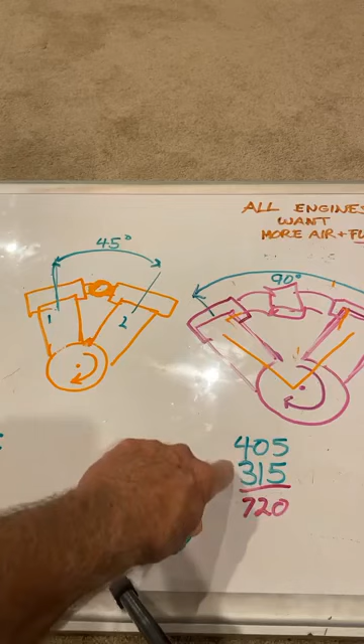So that's 405 for one stroke, 315 for the front and the rear. 405, 315, 405. Now look how far apart these are. That's why we have some really weird stuff going on in this.

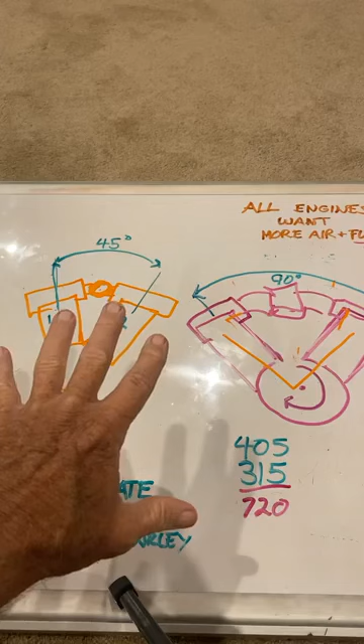And this is just for general knowledge so you guys can understand why some engines sound like an electric engine compared to this really weird piece that was designed back in the 1800s and finally went public in 1903. Harley started selling these to people in 1903 with this same combination.

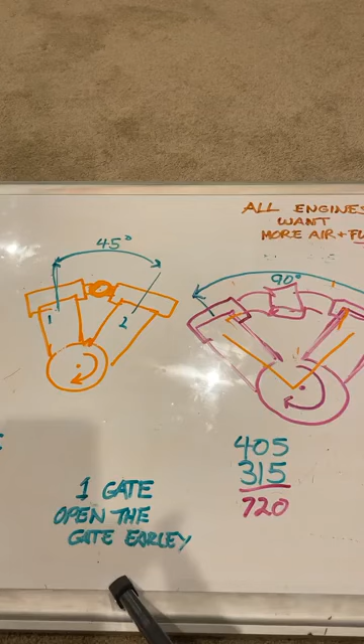And it's been loved and hated for 120 years. Okay, 119, I think. But it's something like that. It's been loved and hated pretty religiously. But this is what I wanted to tell you about the hood scoop side of it.

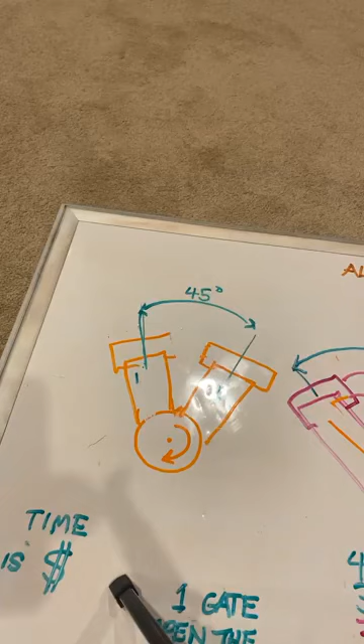On our Pro Stock bike, and many of you that did put an airbox on, you're able to run a set of stacks on here. And you put this inside of an enclosed airbox with a big scoop on the front. This is for demonstration purposes.

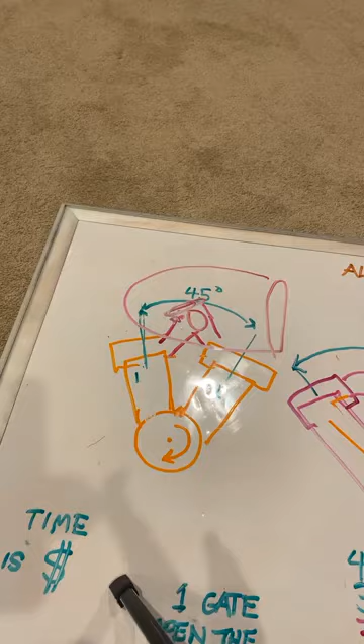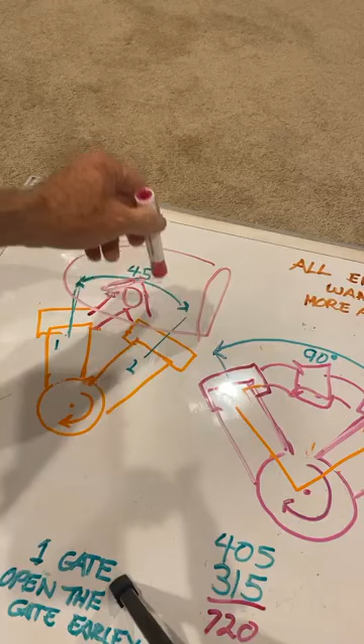At big speed, this fills up with air, and it is full. It's not supercharged, it's not turbocharged, it's not very pressurized, but it is not in a vacuum when this engine is running at full song.

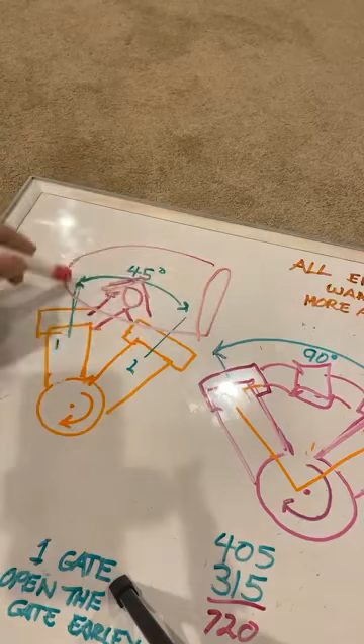So this plenum, I'm gonna call this the plenum. It's really the scoop, the hood scoop, the air box. You can call it an air box. Pro Stock motorcycles run them. Pro Stock cars run them. Many vehicles run an air box now.

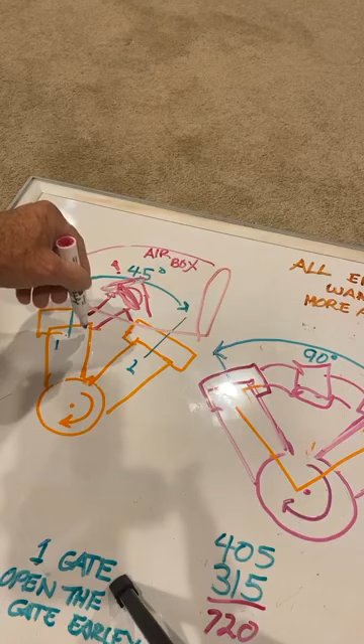But what this has done is create a situation where we have a certain amount of pressure. Let's say it's 10 inches of water pressurized in here, waiting for the intake valve to open. All right, this rear cylinder gets 405 degrees of saturation time, so it builds up a little bit more boost.

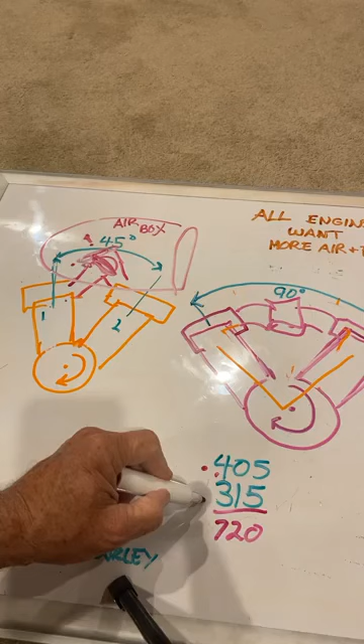When the 315 guy opens, this is going to sound a little confusing, but the rear fires, and there's 10 inches of pressure in here, and the rear takes an intake stroke. 10 inches of pressure goes in there. Well, that air box gets depleted almost instantly, and then it has to go all the way around, so the pressure builds up.

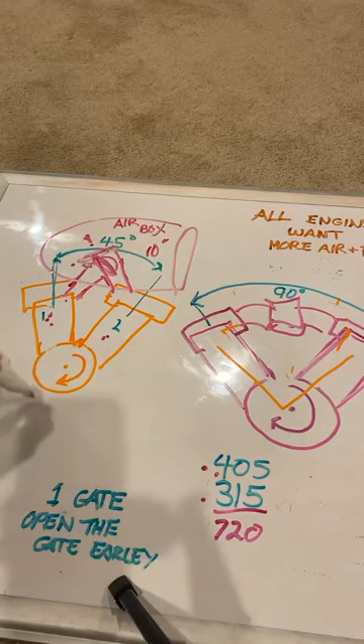So this rear cylinder gets more air pressure in this throttle body than this one does, because there is only 315 degrees of time for this to build back up to 10 inches, and there is 405 degrees